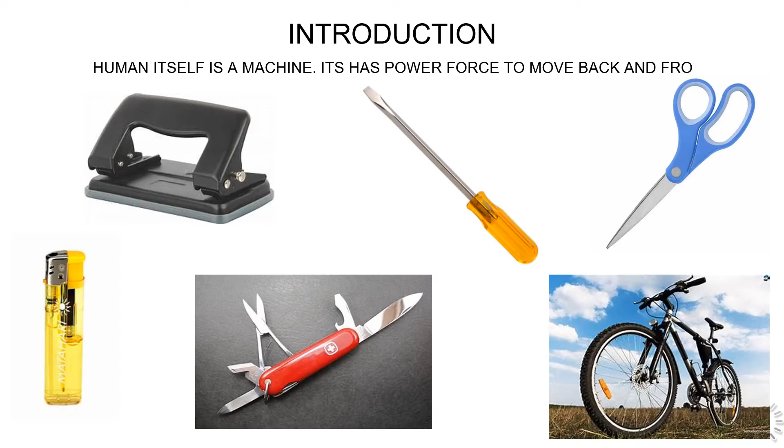When we started to think about human powered simple machines, some words came up like physical, easy, force, less mechanical, the brain powered part, and simple products that we usually see in market like mop, bicycle, knives, etc.

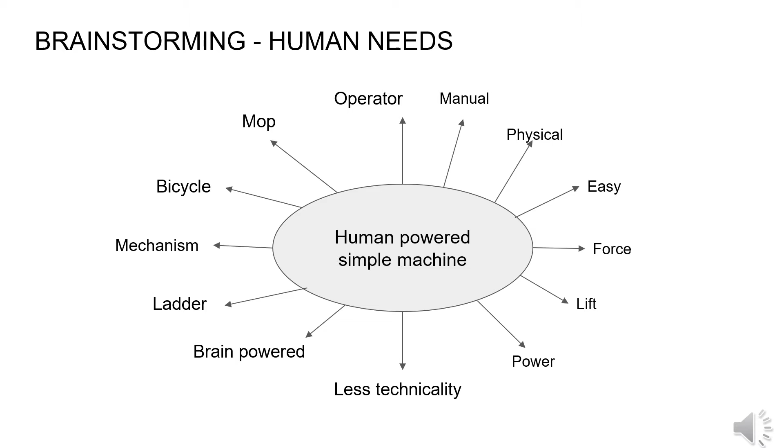Our initial design started with products already available in the market, and we tried evaluating them in a different way. For the mop, we tried to give it a water container so that it becomes a bucket-free mop, then thought about some general things and human needs we daily use in our lives.

We considered the mixed pocket holder, which would be a different type of pen combination, then thought about the shoe rack, the mobile, and platforms like the loft part and the kitchen platform area.

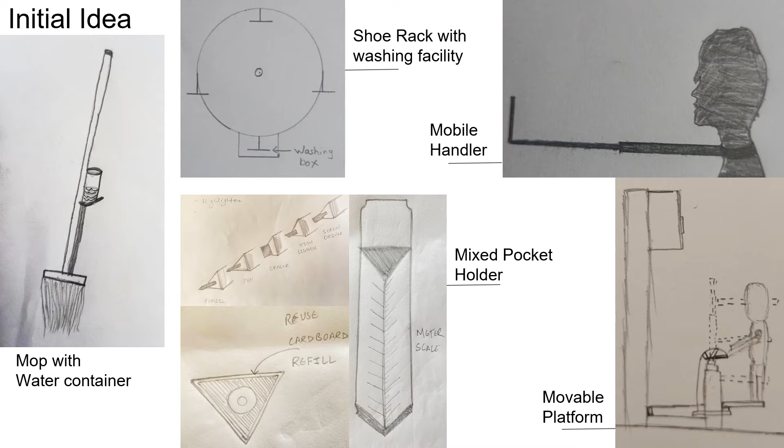After discussing the initial ideas with our mentor, we came up with the product mop and started working on it. We first studied different types of mops available in the market, with different materials and different working capacities.

We also studied the advantages and disadvantages of mopping. Advantages included wet and dry mopping, removable heads, easy cleaning, and reusable threads and cloths. There was also some problem related to the dirt left in the bucket.

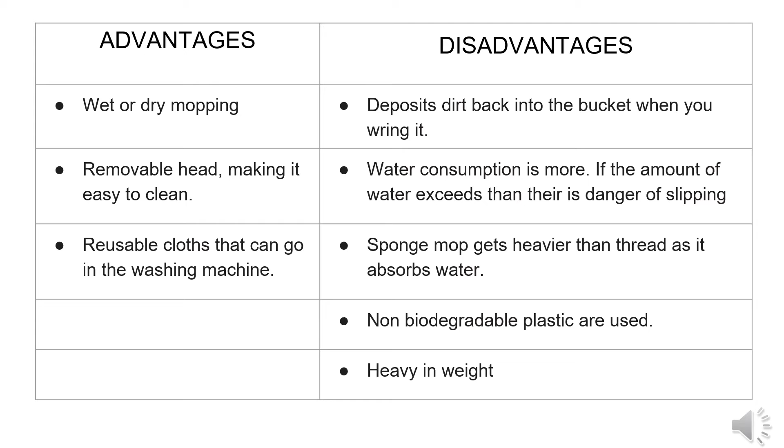There was more water consumption, and the sponge and thread, where the sponge gets heavier when wet. Also the non-biodegradable plastic generally used, and the weight of the bucket due to water. These were some things we considered and worked on.

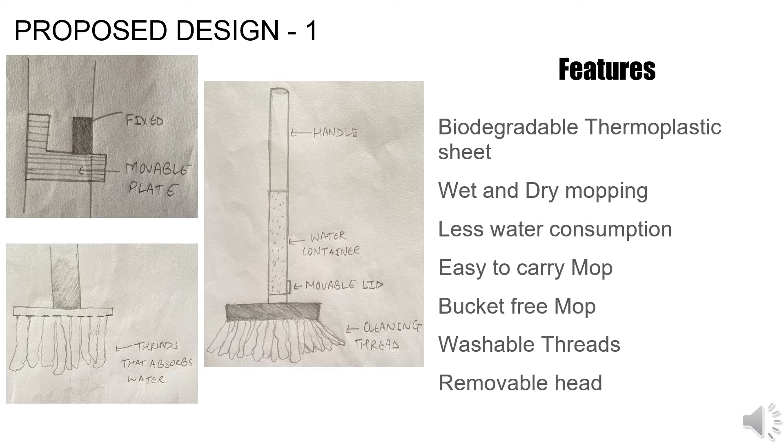Earlier we thought about the mop generally available in the market and tried evaluating it. Then we came up with a different concept where our aim is to make this activity interesting, considering traditional methods of cleaning, because the purpose of having a mop in a house is cleaning. So we tried to figure out the advantages, disadvantages, the use, and everything.

We came up with a different solution which will contain traditional methods, and also benefit the human body as it will reduce the body pain that generally happens while cleaning.

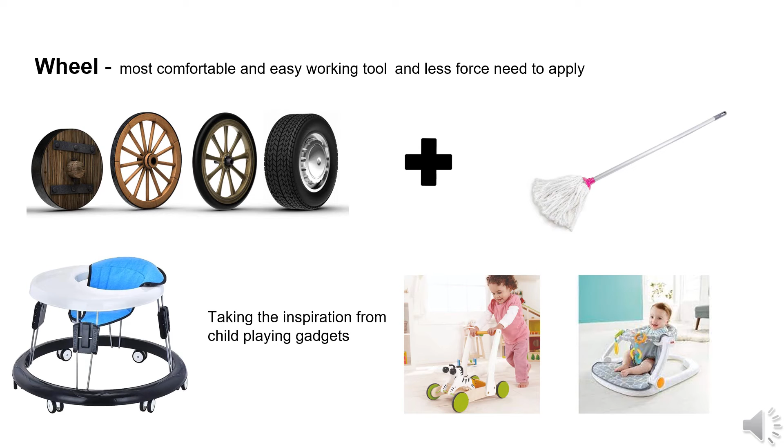We saw different activities which generally happen in a house if there are kids or old age people. We also considered a wheel because it's an easily working tool, it doesn't need much force, and different age groups can use it easily.

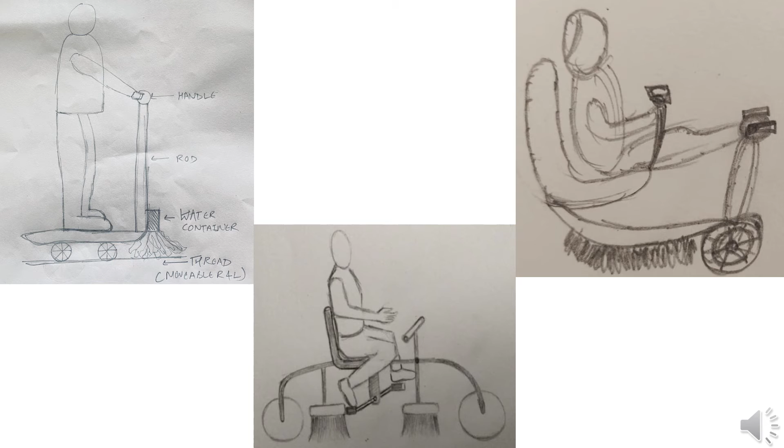We came up with different ideas using different postures. In the first image there is a cycle kind of thing with a thread below so it will clean the floor. Next we have another cycle kind of product which will again have the mop below it to clean everything. Using different postures, we got some ideas.

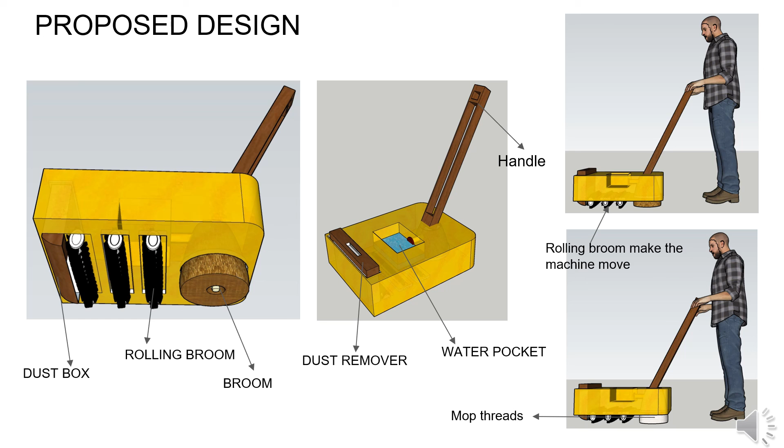Talking about the elementalization of the same, the brushes are replaceable - if one brush gets dirtier we can remove and change it. Also the broom and mop part is replaceable; whenever we want to use mop we can, and we can also change it to the broom. The box and handle are unchangeable, fixed parts, but other than this, if any part gets damaged we can change it.

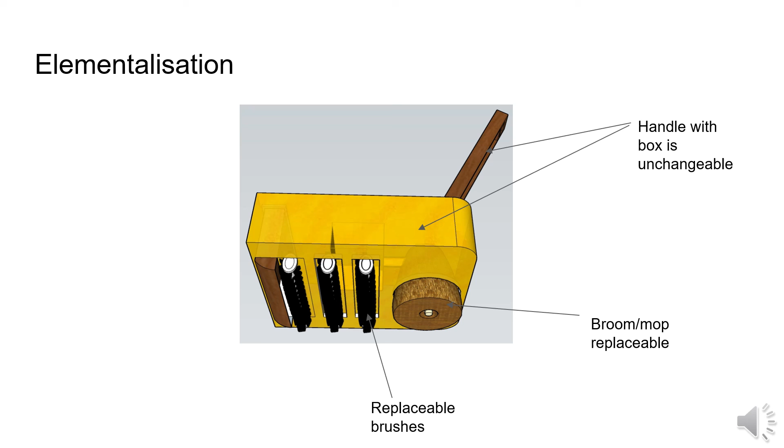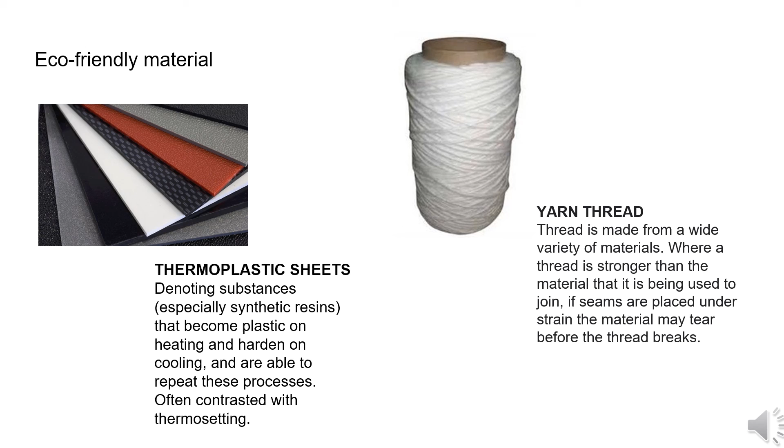Talking about the material, eco-friendly materials are used, like thermoplastic sheets and yarn threads. Also the sticks for the brooms are eco-friendly.